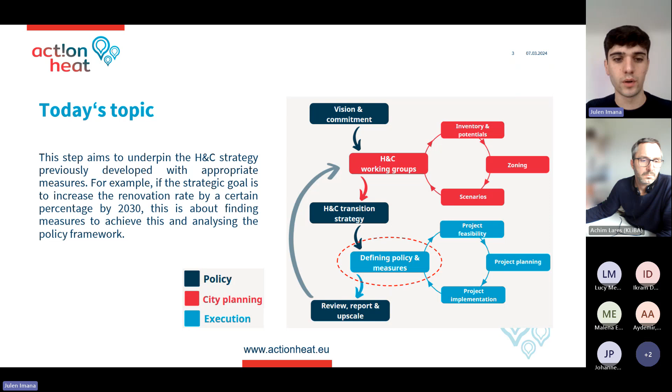For example, if we have a strategic goal of increasing the renovation rate by 10% by 2030, then in this step we have to find which measures will help us achieve this goal and which policy framework we have that will enable us reach our objectives. But I'm sure that Ali will much better explain this.

Ali is the researcher and project manager in the Competence Center for Energy Technologies and Energy Systems at Fraunhofer ISI Institute. His research areas include the assessment of technologies to improve energy efficiency or reduce greenhouse gas emissions, also focusing on heating planning, and he is actually coordinating the ActionHeat project. So Ali, I give you the floor to explain the measures and policy framework for heating and cooling in Europe.

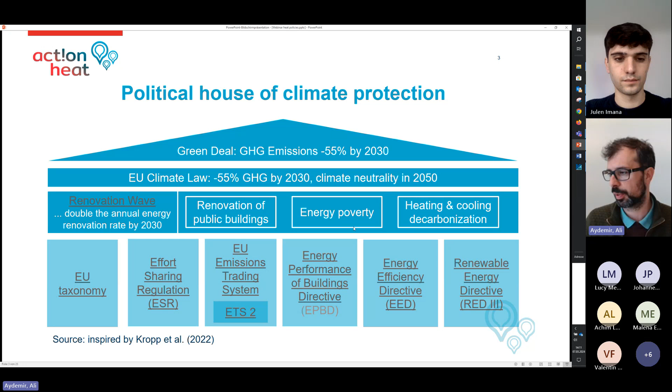And what I'm going to show you in the next slides is I picked up some heating and cooling relevant aspects from each of the directives to set the scene, introduce you to the topic, and in the end I will close with the Energy Efficiency Directive, which is most relevant for heating and cooling planning.

How did it start, or since when is heating and cooling on the agenda on the European level? I would say it has a longer history than going back to 2016. But 2016 was the first year where you had at least a strategy drafted on EU level. It was the first year where we had an overview of the energy consumption and the fuel mix on heating and cooling. And it's been clear for decades that you will have no decarbonized energy system without decarbonizing heating and cooling, which is responsible for nearly half of the European energy demand.

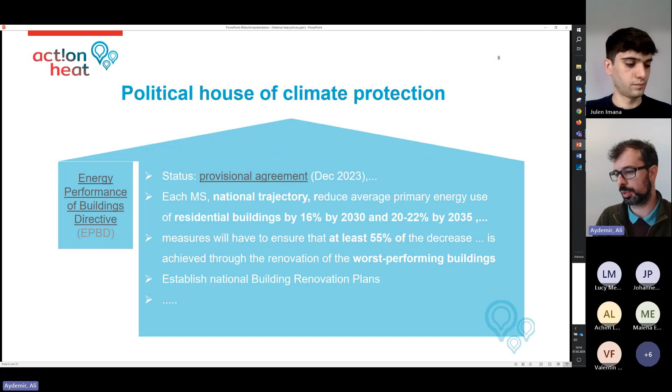With regard to the Energy Performance of Buildings Directive, the EPBD, we have a provisional agreement from last year. Here, the idea is to reduce primary energy use of residential buildings quite substantially, by 2035. We also have goals already announced. And what's very interesting here is that the major share of this decrease should come from the worst performing buildings. So there's a debate ongoing on how to use energy labeling to achieve this goal. And the member states will also have to establish national building renovation plans. This is a very central pillar to decarbonize heating and cooling, because when you reduce the consumption, you have less energy provision to decarbonize.

Then we have the Renewable Energy Directive, overall promoting the use of more clean or sustainable energy in the system. We also have goals here, which are quite substantial. The share of renewables in final energy consumption should be more than 40% across Europe in 2030. That's the goal of the directive. And you also have more specific goals on heating and cooling. We talk about an annual increase of 0.8% renewable heating and cooling for the next years until 2025. And afterwards, this will be increased slightly to 1.1%.

Anyhow, this might be explained by different reasons. For example, Nordic countries have a longer history in heating planning. They also use more district heating. But for the case of Sweden, also the share of biomass, because the potentials there are higher compared to Germany, is quite higher.

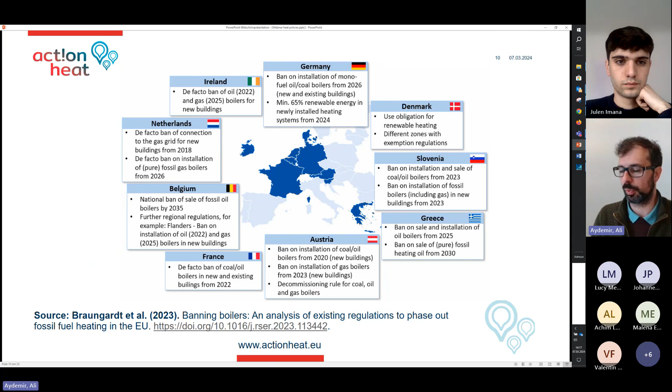And then with regard to fuel mix on heating and cooling, I brought a slide for you, which is from a scientific paper from Braungart et al. And here you see it's an analysis on existing regulation to phase out fossil fuel, because it's clear when we want to change the system, we have to start with phasing out the fossil fuel at some point. And you see several countries have already implemented measures. For example, in Germany, we last year debated very intensively on phasing out natural gas.

And last but not least, very central for heating and cooling planning, we have the Energy Efficiency Directive. Here we have also increased reduction goals on energy consumption, energy saving obligations. Very interesting with regard to heating and cooling is also Article 12 on data centers, which at least requires operators of large data centers to provide data. Which is very interesting, for example, for analyzing potentials on excess heat, for example as an energy source for district heating, and this is also relevant for heating and cooling planning then.

And then in Article 25, Section 6, we have a requirement on local heating and cooling plans. So by the directive, member states are right now responsible to create a legal framework for heating and cooling planning that ensures that these plans are prepared for municipalities with populations higher than 45,000, and it's quite comprehensive what's written in there, because you have requirements also on how you do such heating and cooling planning.

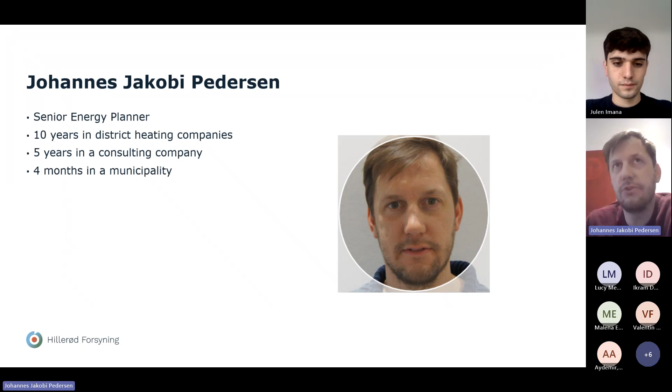As you just said, Julen, my name is Johannes Jakobi Pedersen. I have 15 years of experience in this field, and I work for a utility company here in Denmark that is presently planning to build some new district heating systems separate from the ones we already have. And I'm going a bit through the framework we have for how to do this, and also some of the things we are doing to make it a success.

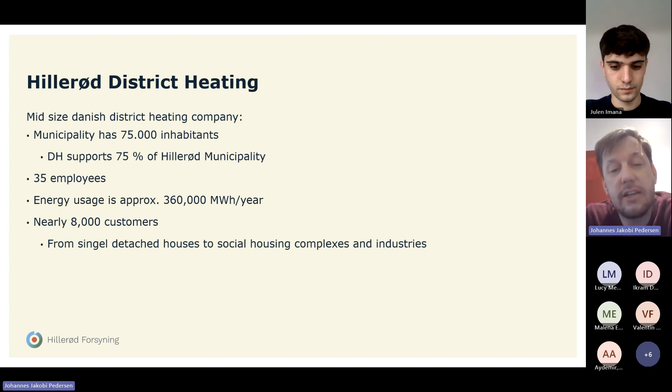Just to give you a context of how big we are: in the Danish context, we are mid-sized. The municipality that owns us has 75,000 inhabitants, and 3/4 of those have district heating. The company itself has around 35 employees working with district heating. We are a multi-utility company, so we have more than 200 in total, but these are the ones who work only with district heating. We have energy use of around 360,000 megawatt hours a year, and we have around 8,000 customers, which is everything from a single detached house to big industries and complexes.

So first off, I don't know where people are from, and in some countries, district heating is already an integrated part. In some countries, it's almost non-existent. And if you're building from scratch, or if you already have a district company or an infrastructure, it's two very, very different things. And I'm talking from a perspective, also what was on the last slide from the other speaker, that in Denmark, we have a pretty good framework for it. Most cities already have district heating. So we have a lot of framework for what we are doing. We don't have to invent a lot of new things.

The reason why we are building out to the smaller towns around us is because the Danish government, under the oil and gas crisis, told us to limit the space heating from natural gas and oil. And even though it's not by law, because we are municipality owned, our owners kind of told us that this is also what we're going to do. And it's either us or heat pumps, and heat pumps are selling in a bit different way than we are. So it's kind of a race against time if we want to do anything in these smaller cities.

So I'm going through three things. First, just to give you context about what are the frameworks that we are operating under and how they determine what we can and cannot do. And then I'll end up talking a bit about what we are actually doing at the moment. And it's going to be on a pretty broad level. I'm not going down into the details because 10 minutes is simply not enough time to more than just scratch. So if you have any questions, I can go a bit deeper on that.

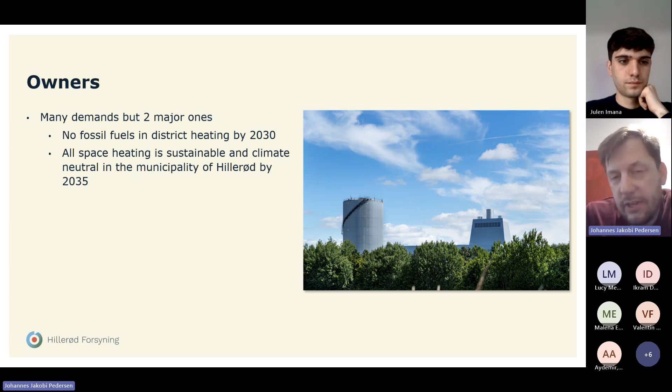The owners, they have many demands for us. The ones that make most sense in this aspect are the fact that we have to be fossil fuel free by 2030, and we are getting closer to that in the next few years. And then we also have to help eliminate all the oil and natural gas consumption in the smaller cities by 2035. And the goal by the government 2 years ago was basically to do it before 2029.

The customers, of course, they also have a green agenda, but if you don't have price stability, if you don't have security of supply, and if you don't have competitive pricing, it doesn't really matter. If the price goes up and down extremely much each year, people can't really put a budget in for you. And if you can't make sure that they have heating when they want it, then they can't really depend on you. And the same if other means of production for heating locally in the houses are cheaper, then they will escape us.

So we have a pretty tight framework here that, yeah, we can do green if those things are still maintained on a very secure level.

And finally, the company culture, and this is not just in my utility company, it's basically the whole Danish context, that in general, people don't think about the utilities they have unless they're not there. And that means that we kind of live a bit in the shadows and have a very low risk profile, because people don't thank us for saving 2 kroner on the bill, but they definitely do not thank us if something goes wrong.

We are also, because of this, quite conservative. And because of the whole approval process, everything we change, we have to get approved. It's kind of a slow and steady change. So a change like 2 years ago, when the oil and natural gas prices suddenly quadrupled, is something that's a bit difficult to change with fast.

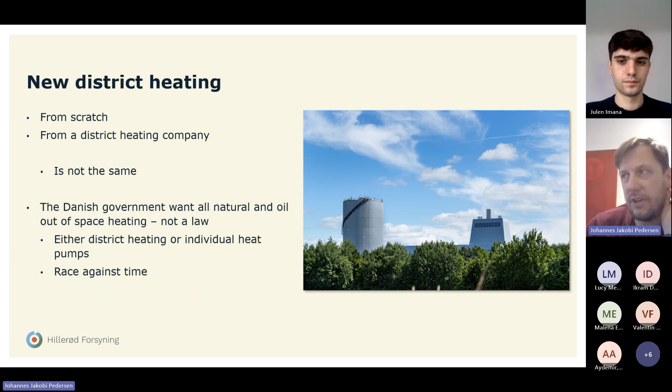And this is kind of the same slide as before, just to come back to it: we have a lot of framework. We're not operating in a void. As long as we can find a space where all these things overlap, it's pretty easy to put up a district heating system. And because we have to go out and find these small towns around us, they're not the most straightforward projects economically, but they are there, and we are kind of trying to figure it out.

The project proposals have been approved, but they assert that 60% of the potential customers in the city have to sign a contract that they are willing to get district heating. But the economy is not necessarily stable with 60%. You might have to have 70 or 80% over time. So there's a risk factor in between those two numbers.

And this is kind of where our owners are pushing us down a way that isn't necessarily the best economical solution, but it's the best for the municipality as such, because the more people have district heating, the less insecure the supply is for the customers, and then generally the price will go down.

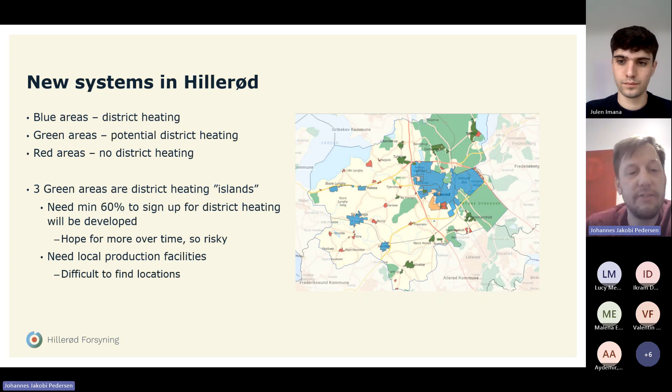And then finally, when you're actually talking to these people, you have to do a lot of things simultaneously. So if you are in a system where you haven't been building out very fast because you've been slow and steady, and suddenly you're maybe getting 50% more customers, not volume-wise, but just by customers, you have to suddenly build up a capacity to deal with so many people writing you and calling you and putting them through the system and making sure that they have their billing coming in.

You also have to make very competitive prices with these people that don't really cause harm to the existing customers. So you have to communicate those things both to the existing customers and to the new customers. At the same time, you have to prepare physically for how do you actually go out and where is this pipe going to go, and how do we close down this road and make sure that the traffic can go around it and that people can go to and from work.

And there's a lot of things that still make it very complicated, but at least we understand what is to be done, but it's a lot of moving parts to still make it work, even when we have the background we have. And that was my presentation.

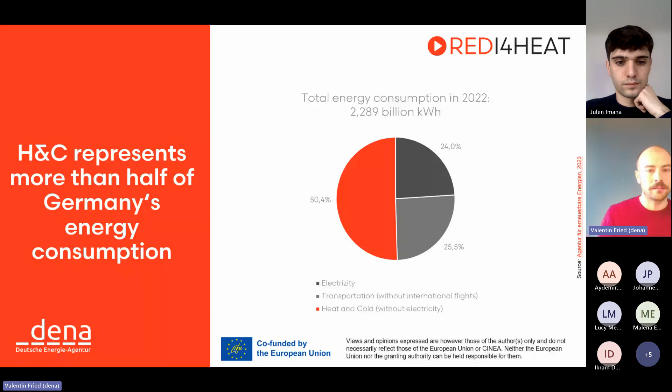And therefore, already a number of policies and policy measures have been taken. There's a number of them, but I want to focus now on the 2 funding pots. The first one is directly targeted to low emission heating networks, so it's going to the municipalities and heating suppliers who are building up infrastructure. And the second pot is for efficient buildings. This can be directly translated from the EU regulations on efficient buildings we have heard about before. It supports measures to improve energy efficiency in buildings and the replacement of old fossil heating systems with heating based on renewable energy sources.

And for house owners, it's very important when they have to make a decision in what technology to invest, to know about their prospective options. So whether there will be a district heating network in their street or not, to narrow it down. And there comes the Wärmeplanungsgesetz into play, a beautiful name for the municipal heat planning. It's very recent. It's effective since the beginning of the year, and it says that municipalities, the big ones, have to conduct a municipal heat planning until summer 26, and the not so big ones until summer 28, and show a path how the heat consumption can be cost efficient, sustainable, economical, affordable, and also resilient. So it must be reliable and greenhouse gas neutral by 45.

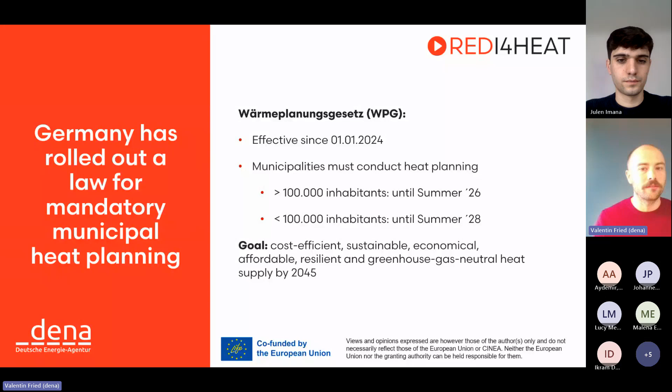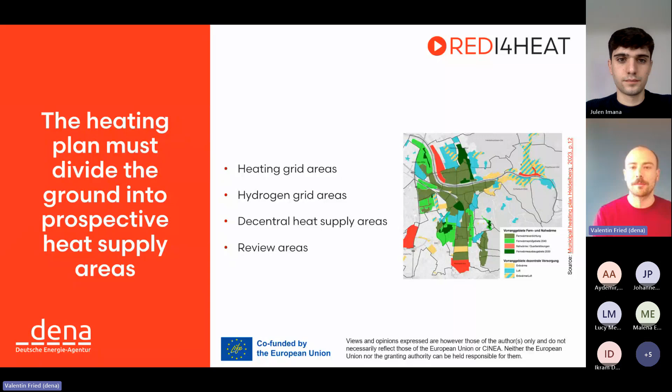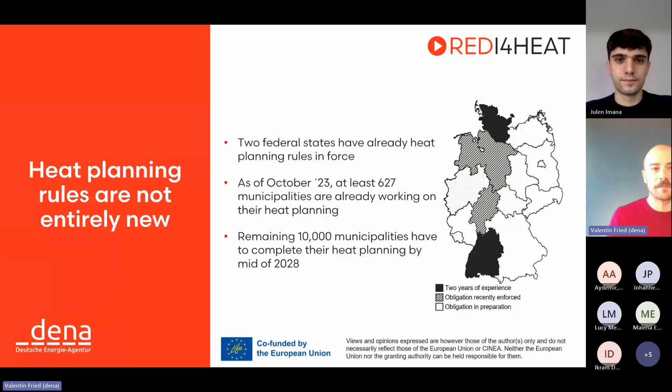The heat planning is not entirely new because there are already 2 federal states who have started it earlier. But as of last October, we had between 600 and 700 municipalities working on the heat planning, and that means that 10,000 municipalities still have to start action on that topic. And now I want to dive into the different steps of the municipal heat planning, which will probably sound very familiar to our previous speaker. I hope the examples help you to get a better picture.

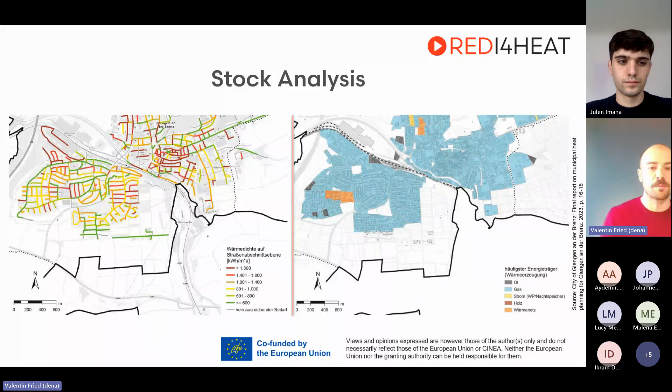The first step is the stock analysis. We're just having a look at what the local circumstances are, what our starting point is. This example is from the city of Giengen, which has already completed their first round of the planning. On the left side, we have the energy density consumed per street section. So we need to know how much energy is consumed nowadays in the different areas. And on the right side, we see on what energy source the districts are relying at the moment. So in the example, it's mostly gas, a little bit of oil, and the orange parts are small heating grids, which are already existing there.

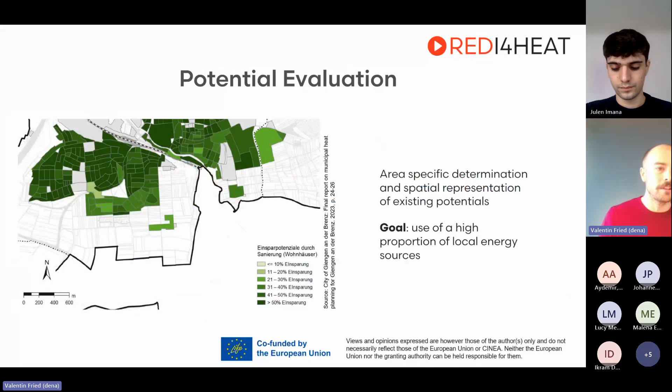The second step is the potential evaluation, and we analyze all possible potentials for achieving a high proportion of local energy sources, green local energy sources. And we have also heard in the previous presentation, energy efficiency first. So on this picture, we see the energy saving potentials through modernization of the residential buildings. But we also evaluate all the other potentials at the place. These can be solar, also geothermal potentials, biomass and biogas.

And it's important to look that these potentials are not competing with higher use cases for the biomass. So we are not taking good wood and burning it if we can build furniture or houses with it. And it must be regional because there will be a lot of requests for this energy source, because it's easily convertible to today's infrastructures. Exactly. So biomass and biogas is limited in the German regulations. And also we look at our water bodies, rivers and lakes, for using maybe big central heat pumps, and waste heat emitters in our region.

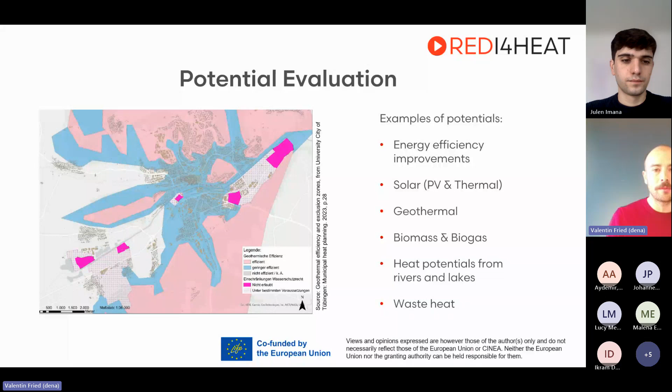So when we're talking about finding the potentials, we also have a look if we have potentials to reduce the risk for investors. For example, are there insurances for securing these exploration risks, or is there the possibility of additional financing sources, which I come back to later.

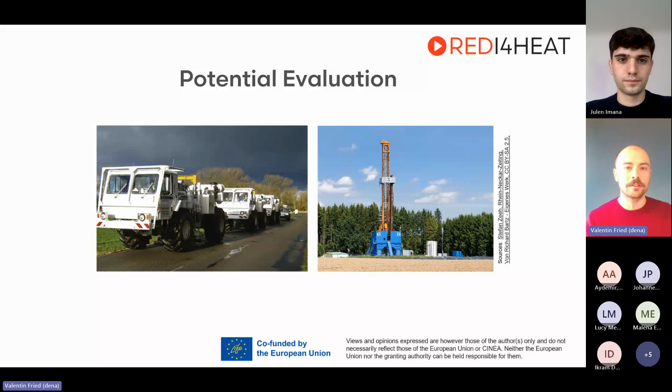Then it's high efforts, and the German government is planning within the next couple of weeks to provide a catalog with technology data and give also some estimations for the different technologies and the related costs. But still, costs are very different. Local circumstances are very different from one place to the other. So this can only be an indicator.